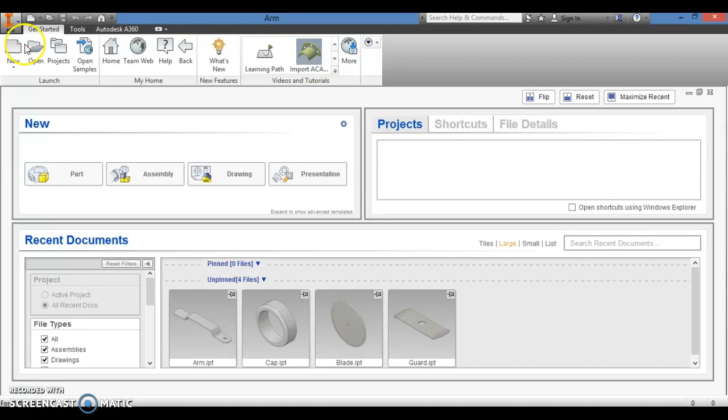The next part that we're going to make is the handle base. Go ahead and start a new part file. Again, standard English, IPT. Let that open up. Start your sketch and choose your XY plane.

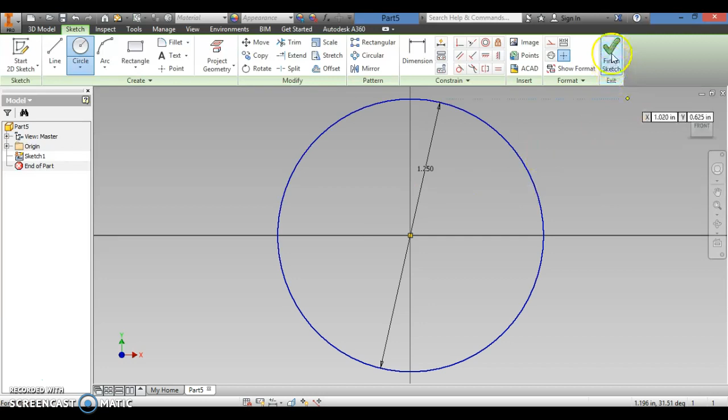For this one, we're going to draw a circle with a diameter of 1.25 and extrude it 5 inches from the center. So I'm going to make it 1.25. Finish the sketch, extrude.

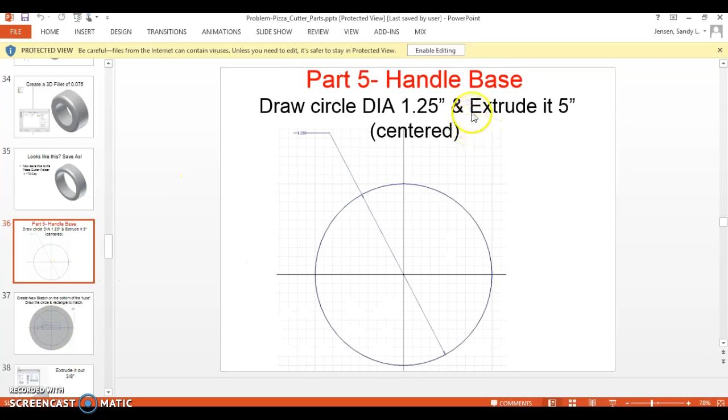5 inches, and make sure that you double check what it says, 5 inches centered. Make sure you're using the same setting. You could do it differently, it doesn't really matter in this situation. I'm just going to go ahead and extrude this. Make sure your circle's centered correctly.

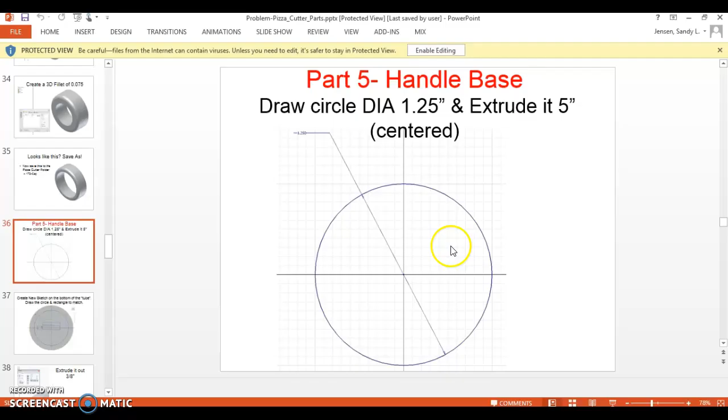From here we now have the base of the handle. We're going to start putting some openings in this and then adding some cutouts basically on the sides to give it some feature.

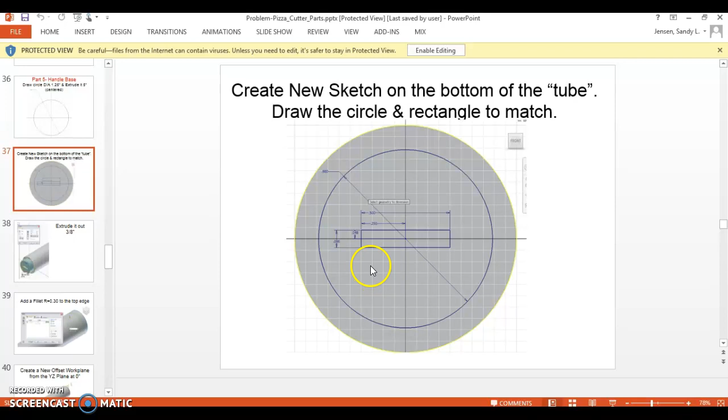So the first part right here, we're going to create a new sketch on the bottom. Start a sketch here, and I'm going to make a circle on the top portion. It's kind of hard to see with this one, so I'll zoom in a little bit.

We're going to sketch the new circle out, which has a diameter of 0.980. So we're going to start a circle here that is 0.980 - I think I already put one here by accident, so let me zoom back into this. 0.980.

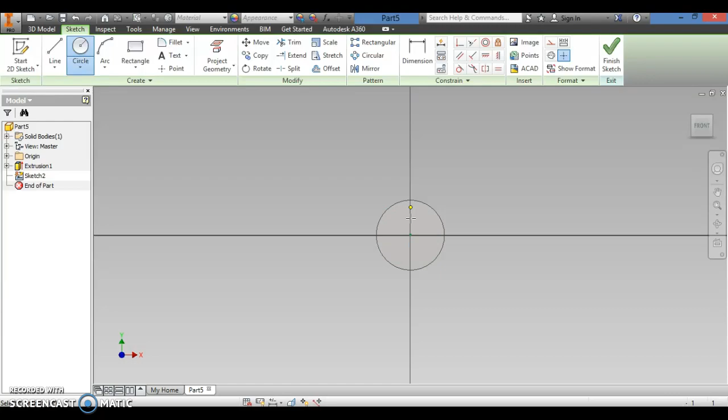Hit enter. And then we're going to make this little rectangular portion right here, so it's 0.5 all the way across. I'm going to zoom in so I can see this, and I'm going to make a rectangle that goes across 0.5 and has a height of 0.096.

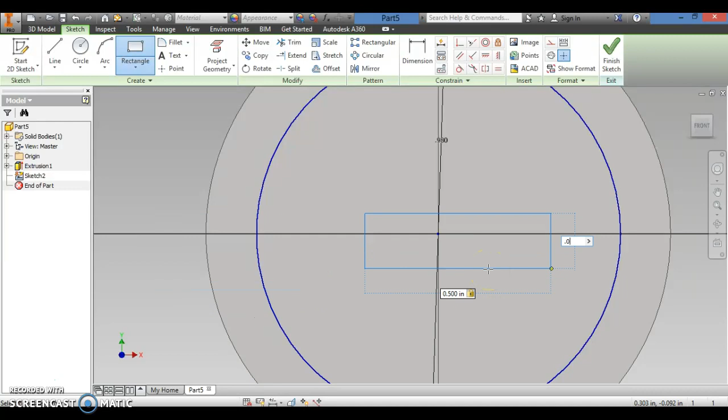0.096. And then I'm actually going to make a guideline going right through the middle right here so that I can dimension this off of here.

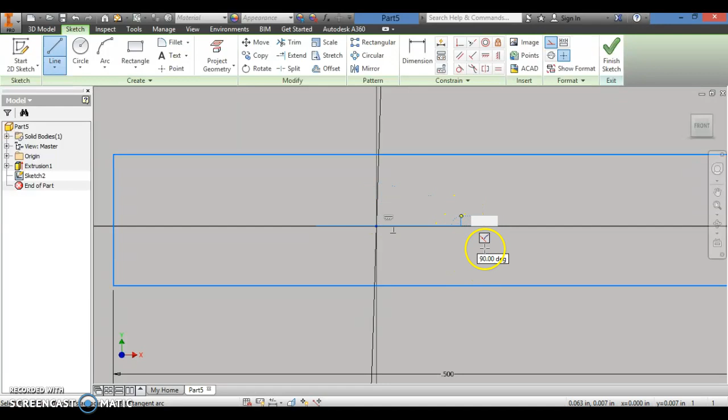So if we change our construction lines using this tool right here, I'm going to make a line right here in the middle, and it's not actually going to be a line that we use to build on, but it is going to be 2 construction lines that I'm going to be using for the purposes of dimensioning.

And I'm just going to make a little crosshair. This is not the only way that you can do this, but I have them here. And then I'm going to turn the construction line tool off, and then I'm going to dimension these lines away.

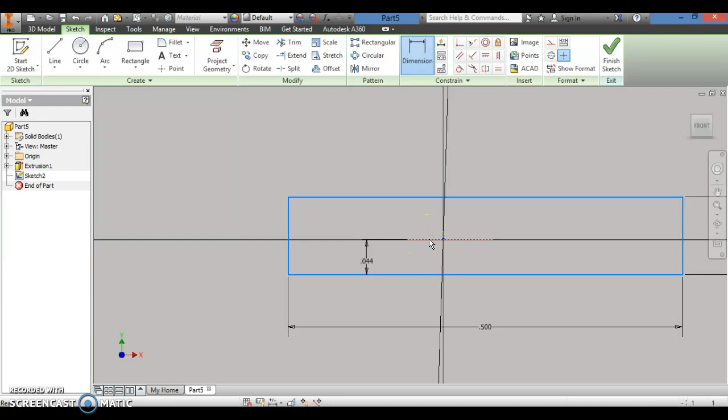So from here to here, the dimension that they give us is 0.048. So 0.048, and I'm going to hit enter. Now if it moves this line like it did mine, just undo it, go to the lock tool and lock this particular point right here.

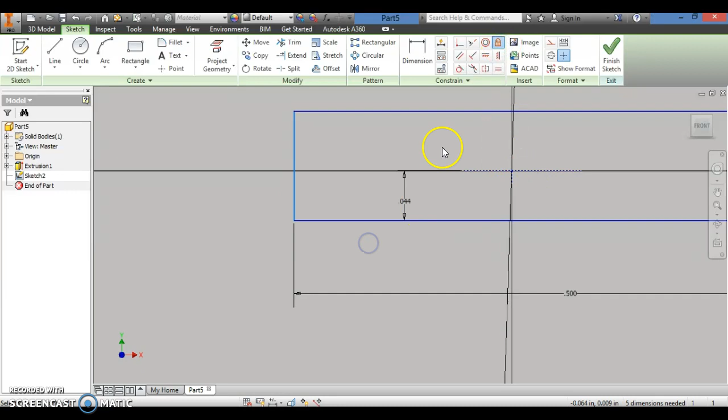And you can do the same thing for the other dimension line that we made. So I locked both of those in place. Then I'm going to turn the lock off - I'm sorry, no, I want to make sure that they're actually locked. Oh, they're already on there, so we can actually disable that.

And I'm going to go ahead and click on the dimension again. It will actually let me set it to 0.048, and it should move my rectangle instead of moving that particular line. Same thing, we're going to space it 0.250 from the center.

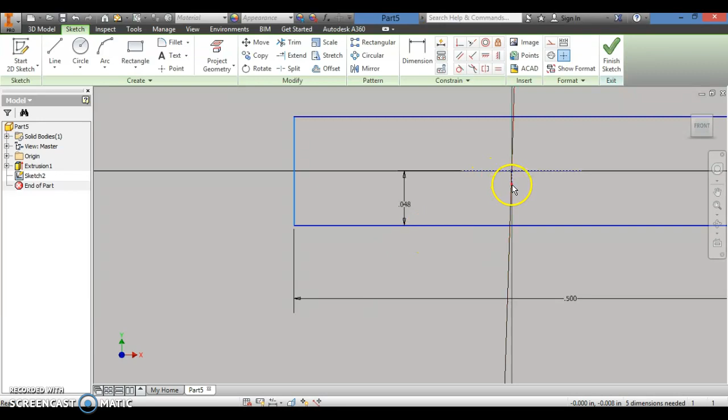So I've got a guideline right here, and it's kind of hard to see because I have a dimension line in the way, so hopefully your dimension line didn't place there. I'm going to zoom in so that I actually hit this dotted line, and I'm going to hit the edge, and again 0.250, and it should move the entire piece over.

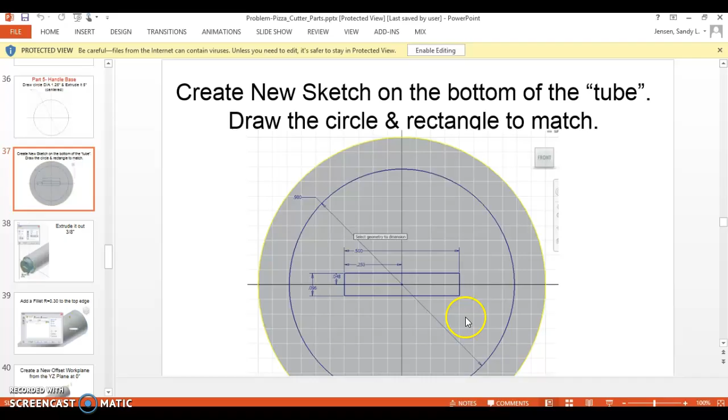Once you have that portion completed, we're going to extrude this out 3/8 of an inch, and it's just a regular extrusion. So finish the sketch, go to extrude, and just select that portion and change it to 3/8 of an inch and hit OK. So you should have something that looks like that.

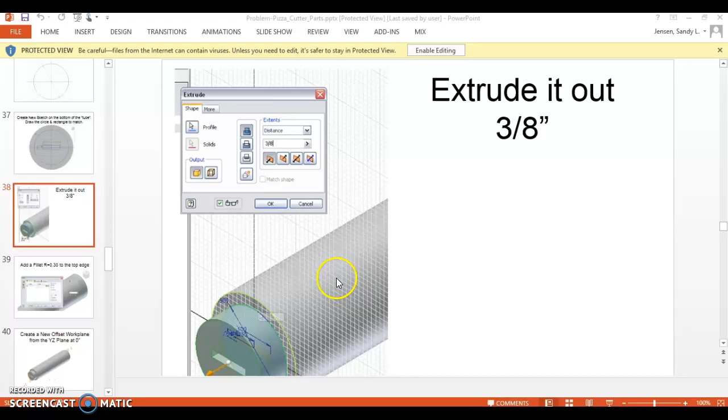The next part we're going to fillet the other end, and we're going to set it to 0.30. So fillet, 0.30, hit this edge right here, and hit OK. So now it's got a rounded edge on the bottom portion.

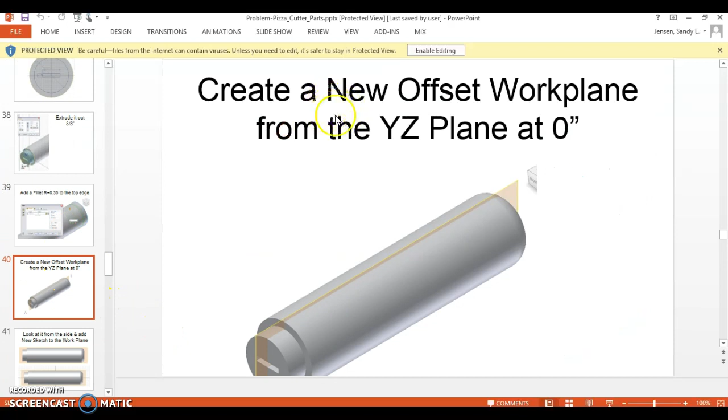And then we're going to create a new offset work plane from the YZ plane and set it to 0 so that we can create these special features coming up. So I'm going to click on the plane tool,

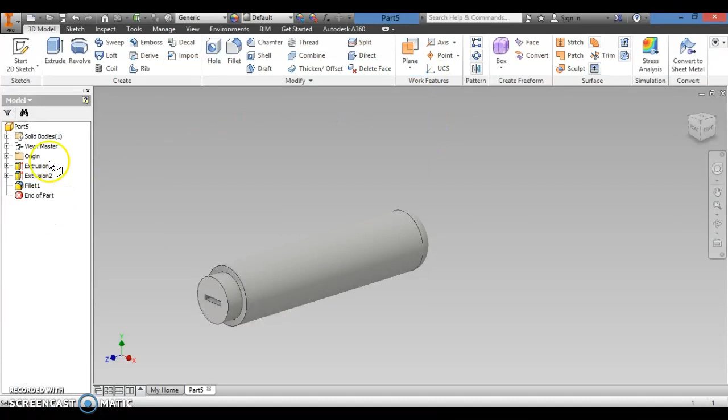It's telling you where you need to choose your current plane that you're going to be working with. Make sure that you choose offset from plane. Go over here to the origins folder, click on the minus button, and it tells you YZ plane. This one right down the middle, and it tells you to offset it to 0. So we're not changing anything, we just want it to be right in the middle of this.

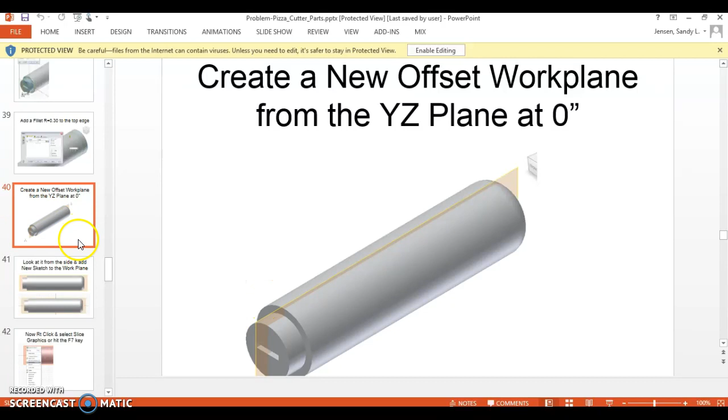And of course yours will look a little bit different than mine, color-wise. Now I'm going to go down here, and if we look at it from the side, we can add a new sketch to the work plane. So I can go to the right side view, start a sketch, and I can click right here on the edge, and it will create a new sketch, and it will go in.

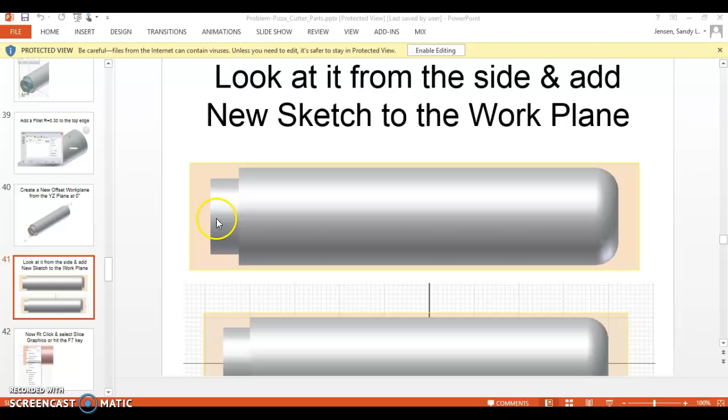From here, we are going to right click and select slice graphics, but it's probably easier just to hit F7. When you hit F7, it will actually slice down to the middle of this. So if I was to rotate it, you could actually see that I've temporarily cut this in half so that I could draw on it.

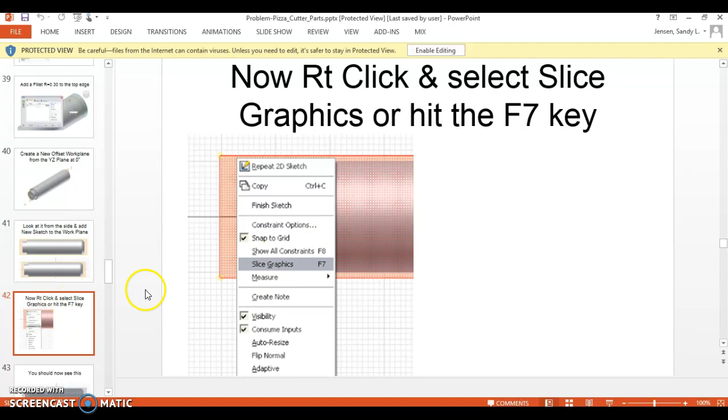Next thing that you're going to be doing after you've done that is you should see this. You won't see all these grid lines because we don't have them enabled. Kind of makes it look messy. But we're going to be drawing a square like this from this distance right here, and we'll make a square over here.

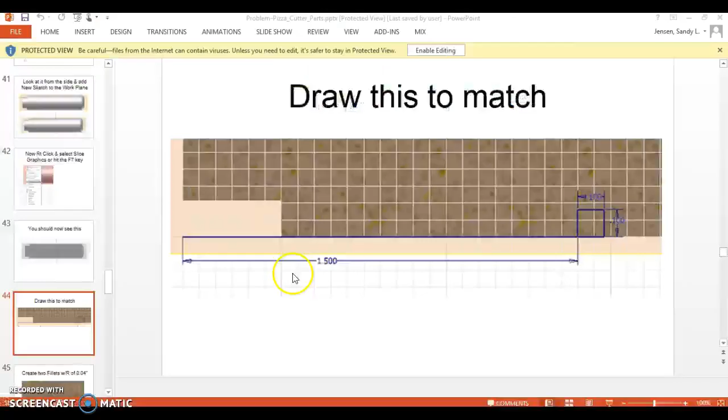So I'm going to go ahead and make a rectangle, or I'm sorry, a square that's 0.1 by 0.1. So we've got a 0.1 by 0.1 like this, and then I'm going to use the dimension tool to move this from this edge right here 1.50, and it should move that over for you, and it should be in the right space. It should be on the edge of the line, and everything should be okay with that particular shape.

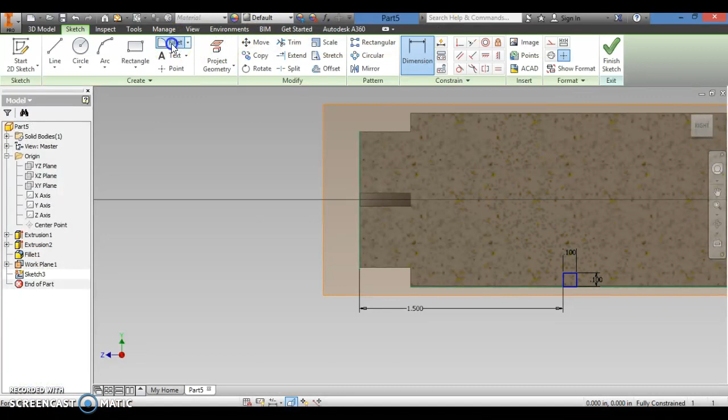Next thing that you're going to do with this is create two fillets with a radius of 0.04 for the edges of this box. So we're going to go to this fillet, set it to 0.04, zoom in so we can see it just to be on the safe side, and we're going to click the edge. Same thing with this one. You can hit the X button and close that out.

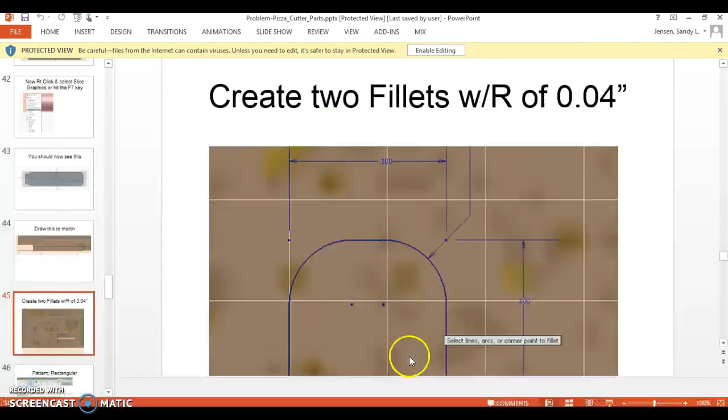Next thing we're going to do is use the pattern tool and the rectangle feature so that we can bring this shape across the bottom here, and then eventually revolve it. So rectangular pattern features right here, and we're going to go in here and select the actual shape that we want to duplicate. So I'm going to drag and highlight this.

We're going to select the direction that we want it to go. So I'm going to click on this one, and you're going to see an arrow that popped up saying that it's making this shape, but it's going this direction. We want to flip the direction so it goes that way.

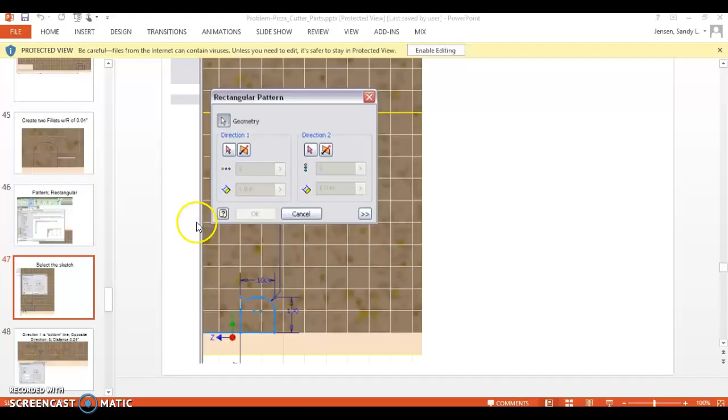And then we need to adjust the spacing and the dimensioning, and they don't provide it here. They're just showing a picture, but we do have the spacing here. They want us to have 8 of them and set them at 0.250. So we're going to set 8, and then we're going to set them at 0.25.

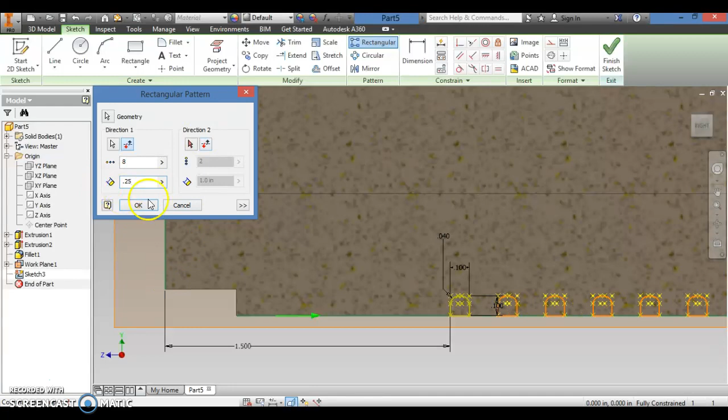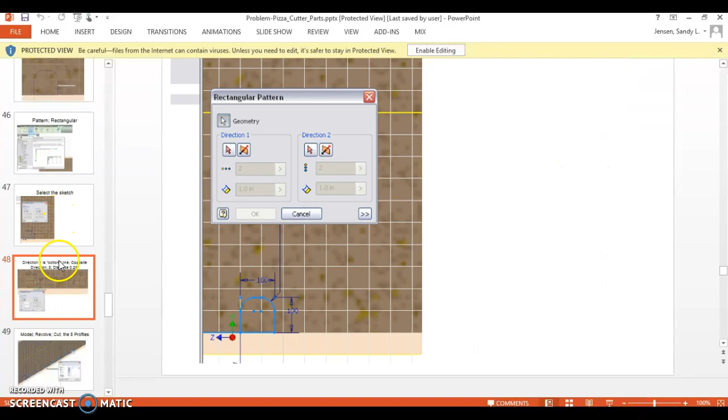And we should have that many. So when you're done, we're going to hit the OK button, and then finish the sketch, and we're going to actually revolve these. You should be able to revolve these before you finish the sketch. If you don't click Finish Sketch, you can go up to 3D Model and Revolve, and it will pull you to this portion, and you can select each one of these.

Set it to cut, and we're going to zoom out so you can actually see it. Let's double check what settings they have. They set it to full, they have it set to cut. All we have to do is select the axis point.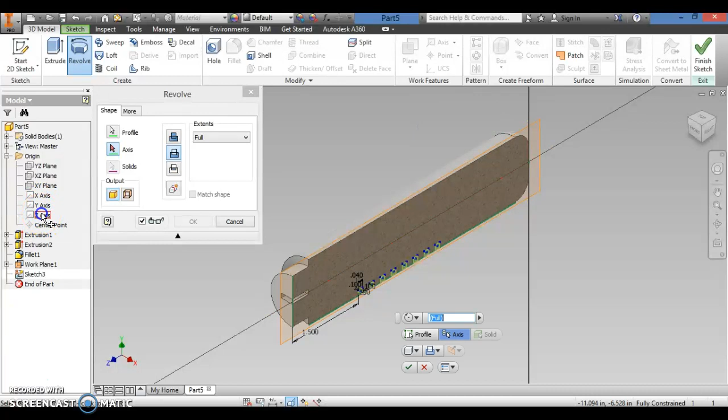So cut, full, select the axis. From here, select the axis. I think the z-axis will work. Let me double check. Z-axis is the one you're going to want to use for this one, and then you can hit OK. It will actually cut that shape out for us so it looks like this.

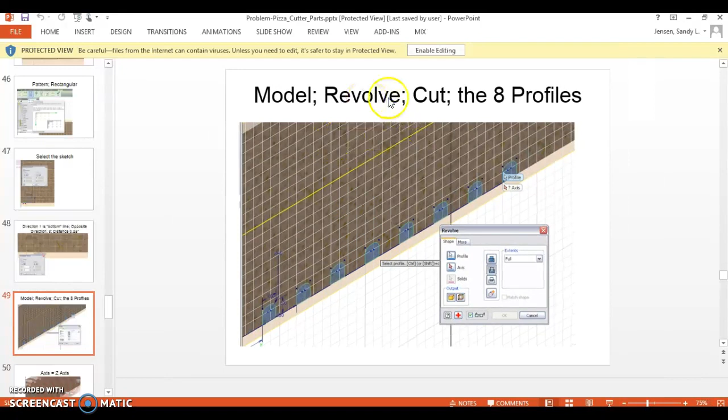So again, they tell you in this one, and I'm zoomed out so it's kind of difficult to see it, but model, revolve, cut the 8 profiles using the z-axis, which they tell you in the next slide. So it should end up looking like this.

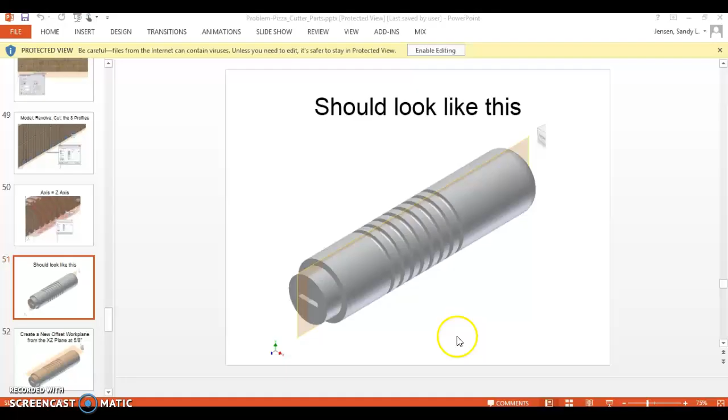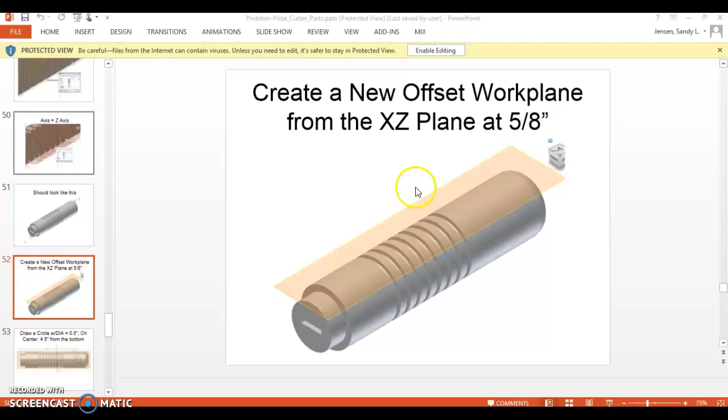So we're going to create a new offset work plane on the edge of it so that we can cut a hole through it. Again, create a new offset work plane from the XZ plane at 5/8 of an inch. So from the offset, and they said XZ and 5/8 of an inch. So we're going to change this to 5/8. Hit OK. And then we're going to start a sketch on this one.

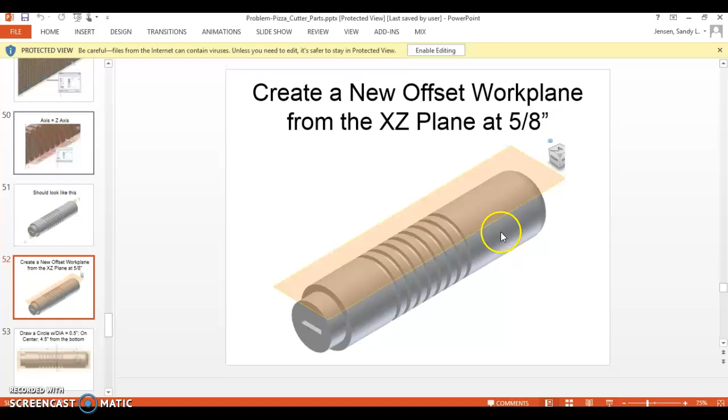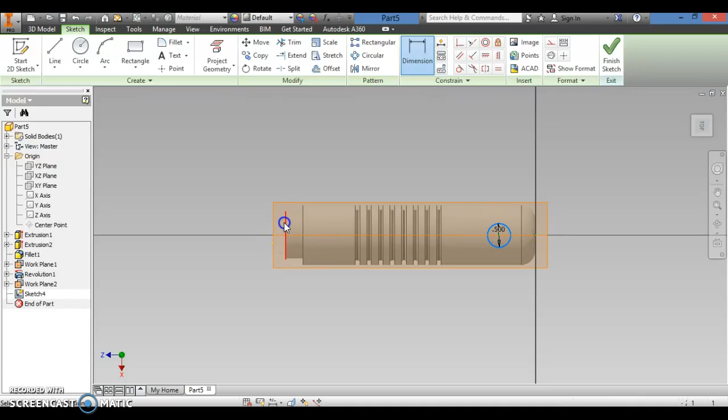And I'm going to flip it so it looks more like this, kind of like this one. And then I'm going to draw a circle that has a 0.5 diameter, that is 4.5 distance from here. So make my circle right here in the middle, 0.5 diameter using the dimension tool from this center point to the edge right here, 4.5. I'm pretty close, but just change it if you're not on the money.

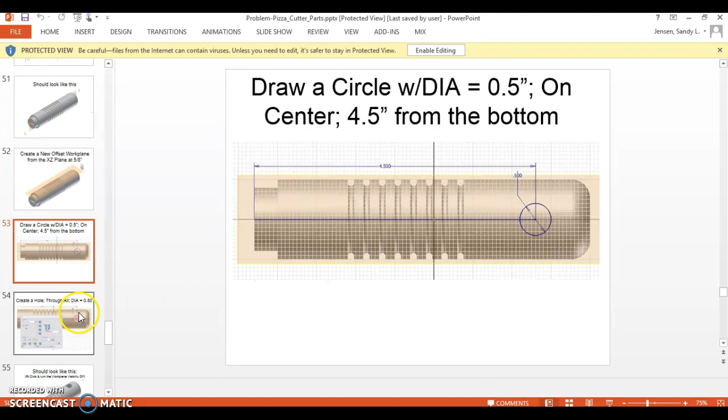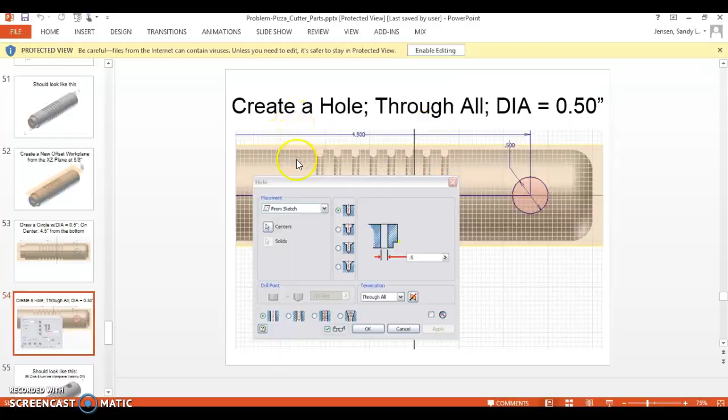And then from there we should be able to create a hole and extrude it all the way through. They're using a hole tool for this one. You don't really have to, you could just extrude this one. If you wanted to, you could go to hole and select that point and cut all the way through, but I'm not going to. I'm just going to use the extrude tool for this one. Cut, set the distance to all, so it goes all the way through, and just hit OK.

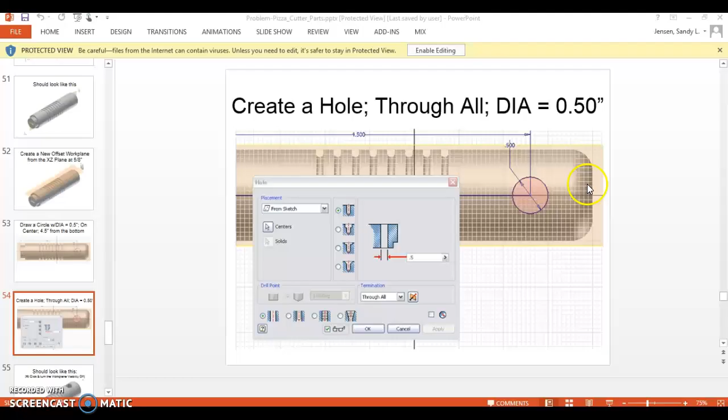So you have a hole that ends up looking like this, so your part should look like that. Once you right click on this and turn the visibility off, and right click on this one and turn the visibility off, you should have a part that looks just like this.

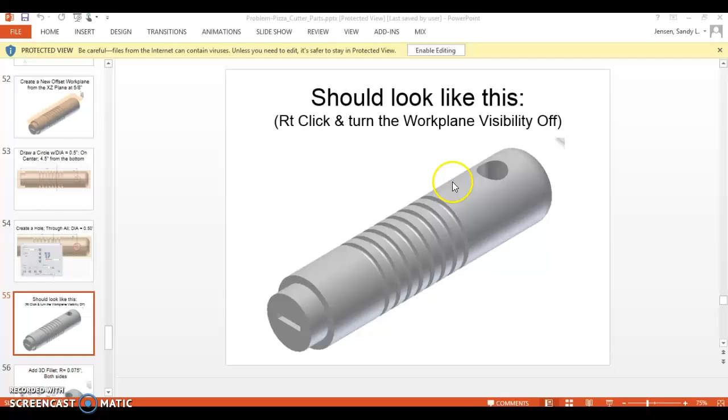Once you have that completed, you're going to add a fillet to the edge of the circle of 0.075. So we're going to fillet this really quick, 0.075. Select the corner. Do the same thing on this side. Hit OK. So you have rounded edges on it now.

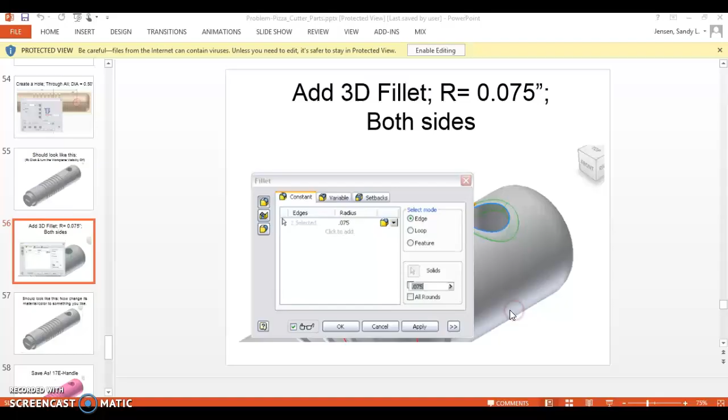And then you can change the material. I would go with something along the lines of an ABS plastic. So let's see what we got up here at the top. Just set it to ABS plastic. Leave it smooth, it actually will look pretty nice this way. And if you want to get rid of the lines, remember, change the view to realistic.

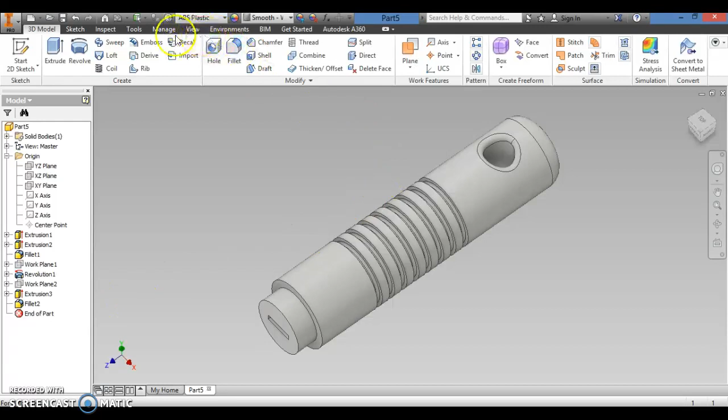Again, at this point you can give the handle a color if you would like, but make sure that you save it as handle. I'm going to go ahead and color mine really quick, and let's make sure I select everything, and we'll give it like a blue. And then I'm going to hit File, Save As, and save this one as handle.